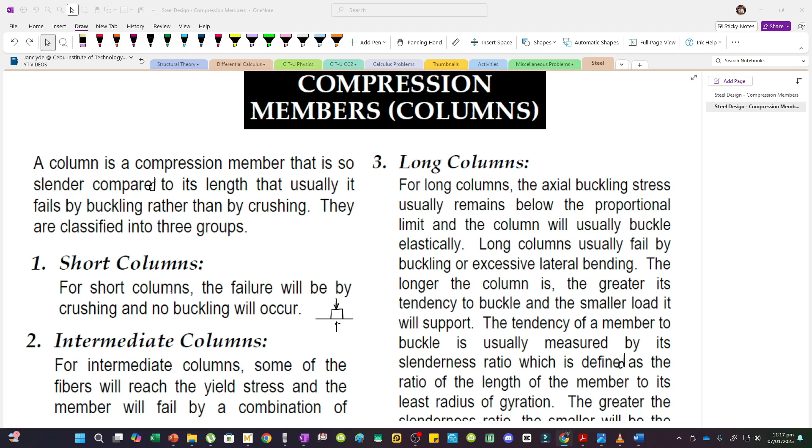Now for intermediate columns, there are two failures: yielding and buckling. Let's elongate this. This part is crushing, this is for concrete columns. For steel, I put yielding, yielding failure. So for intermediate columns, it's yielding and buckling.

But for long columns, the failure is by buckling alone. If you try to imagine, for long columns, our member is within the elastic zone.

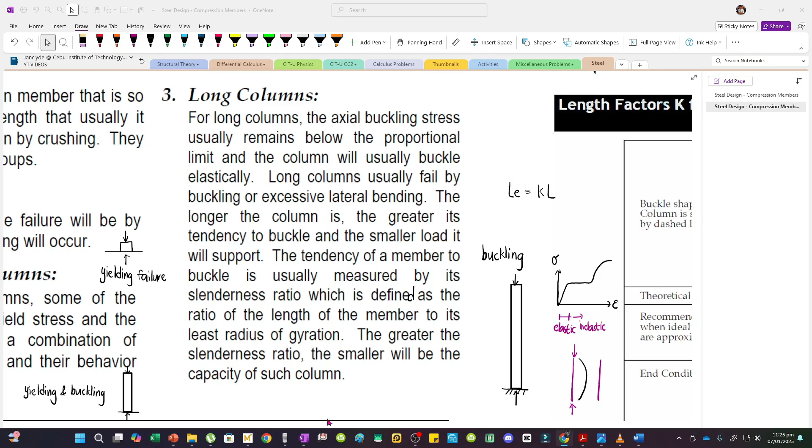Now why are there two failure modes for intermediate columns? It's because part of the column yields, and part of it buckles - so it's a combination of the two failure modes. This is the reason why, in intermediate columns, once we solve for the capacity, it's just the interpolation between yielding failure and buckling failure - like an interpolation between short column and long column.

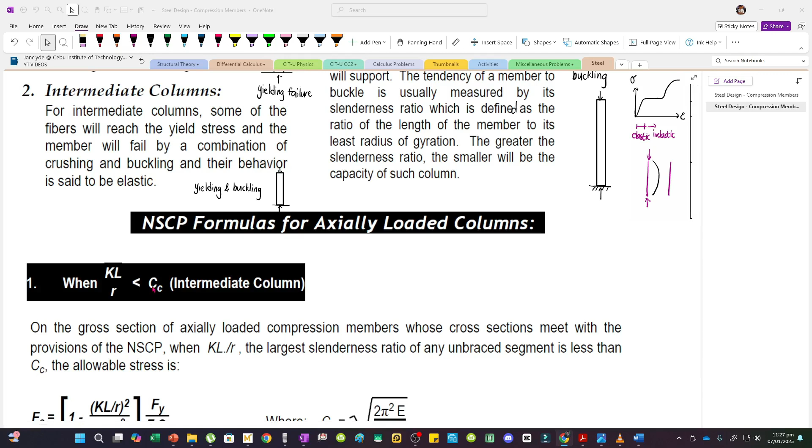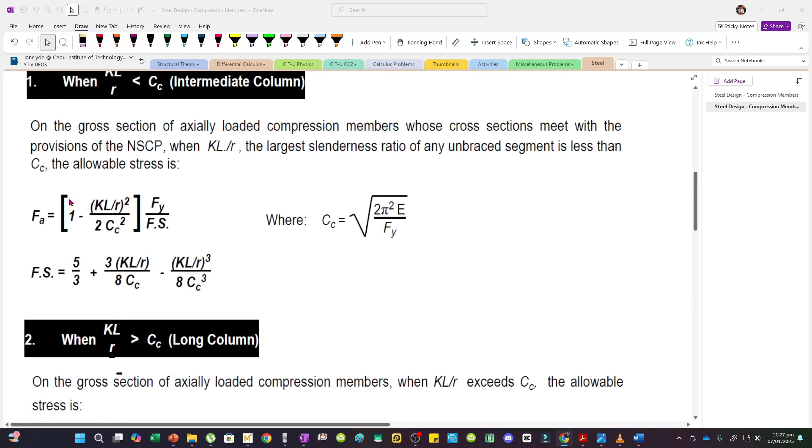If we look at the NSCP formulas, we have the following conditions: when the slenderness ratio KL over R is less than C sub C, that's the intermediate column. And when KL over R is greater than C sub C, that's what we consider a long column. Only two conditions - there's no condition for short columns, because short columns have no practical use. In buildings and houses, our columns are always long, so there's no point considering short columns.

Now for long columns, to know the capacity before it buckles, the concept we're going to use is the one derived by Euler. This is called Euler's formula with a factor of safety of 23/12.

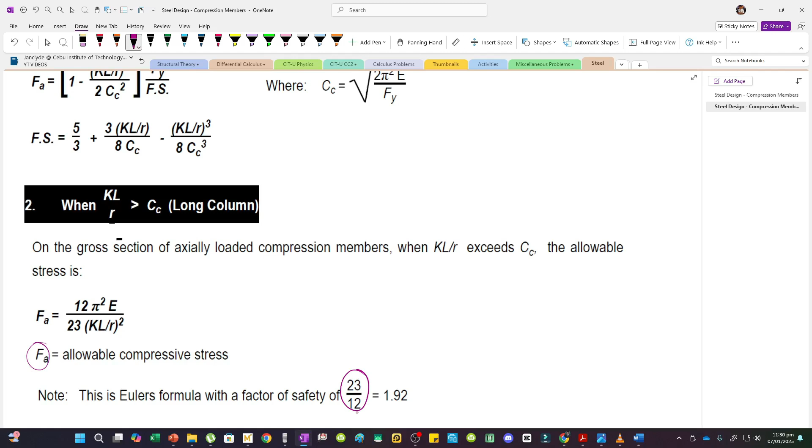Now, why does the factor of safety become 12/23? Notice that FA is the allowable compressive stress. When you have a factor of safety, you can either multiply it to the applied load or divide it into the stress. Now this is a stress value - pi squared E over KL over R squared - this is essentially the critical buckling stress. So stress divided by 23/12, just take the reciprocal, that's why it becomes 12/23.

Now in some books, instead of FA, the label is FE, F sub E. But F sub E doesn't include the factor of safety. This is a formula for stress - let's put Euler's buckling stress as F sub E. This is essentially pi squared E divided by the slenderness ratio, squared.

Now in some books, this is also written as SR, depending on your reference. Now we also have Euler's buckling load, which is P sub E. The formula is pi squared EI divided by KL squared. Our L is the unsupported length.

However, there's no need to memorize this one, because we already know the stress - just multiply it by the area, and you'll get the load. So essentially, the alternative formula for PE is FE multiplied by the gross area. Back in my undergrad, these were really just the important formulas - this one and this one.

Now let's try to draw a graph involving stress and the slenderness ratio. Stress is on the y-axis, and this is the slenderness ratio, let's call it SR. This is essentially the curve - this part is for short or intermediate columns, and this part is for long columns. They have a point of intersection essentially.

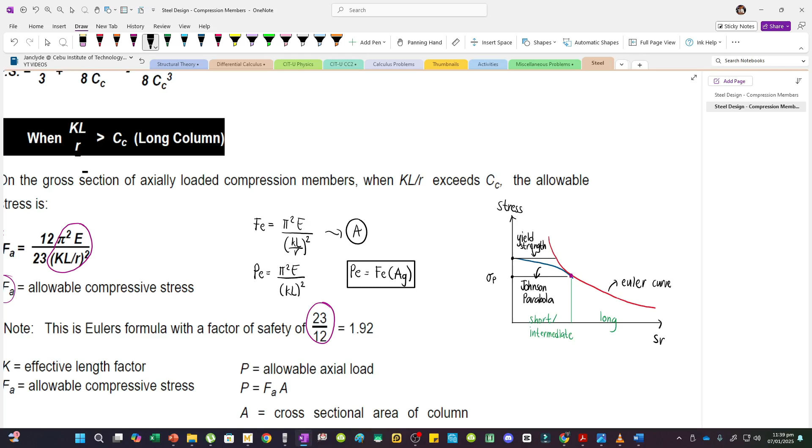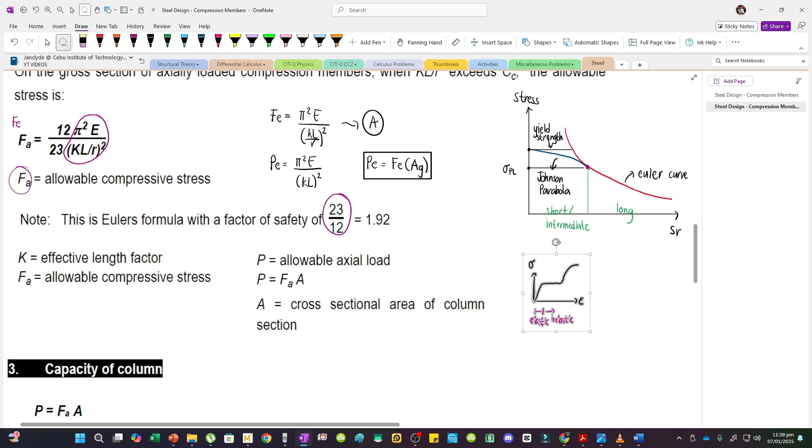Let's recall our stress-strain curve from Mechanics of Deformable Bodies. Somewhere here is the proportional limit, then this is the elastic limit, and here is the yield stress, this is Fy.

Now in real life, when we test just a rod, like in the CMT stress-strain test, these three values - the proportional limit and these three - are approximately equal. But for axially loaded columns, this value is quite lesser than the yield stress.

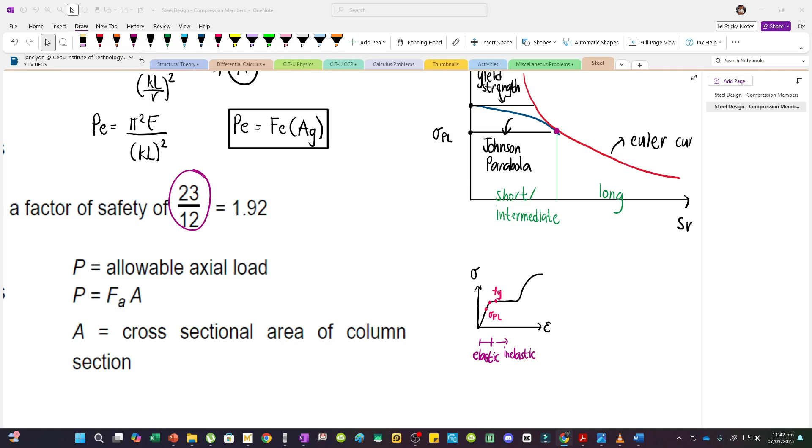The reason for that is if we fabricate sections, there are imperfections, so at lower stress levels already, there's a boundary in the elastic zone. When you trace the Johnson parabola, this blue one, it will end at the yield strength.

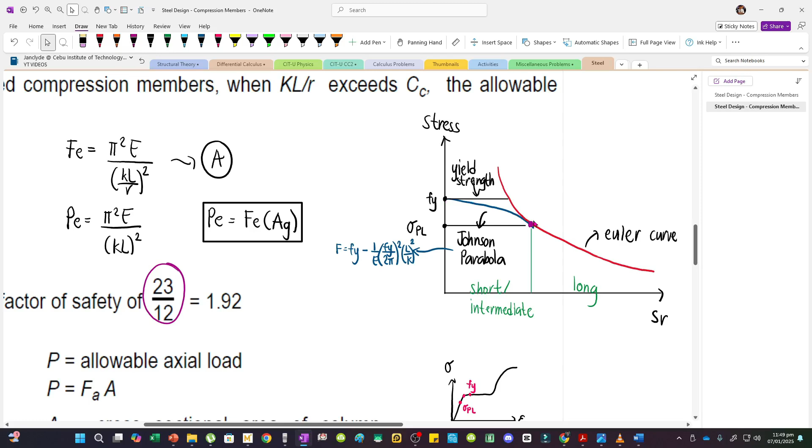But this is rarely asked since you seldom need to interpolate there. Essentially, we can just use this formula for intermediate columns.

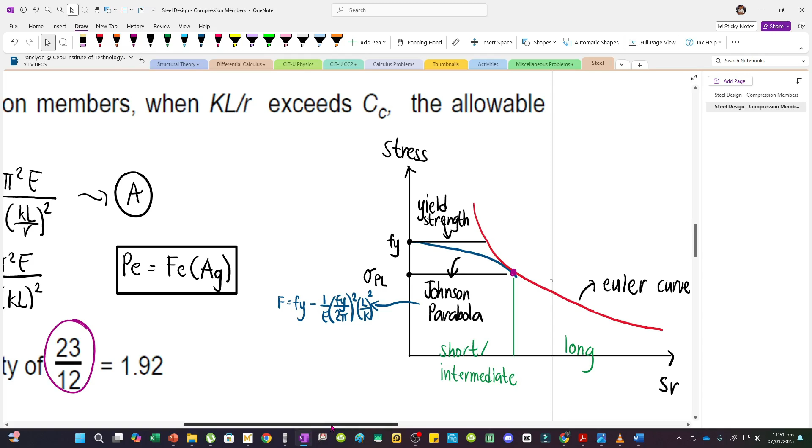Pi squared E divided by SR squared. But in the code, we are trying to reduce it. So what happens is our FCR would be...

0.877, this is the reduction factor essentially of the Euler buckling stress. 0.877 FE. So instead of 100% of FE, what we take is about 87.7% of that stress. And this one, the formula is too long if we use the empirical formula, but it's been reduced in NSCP 2015.

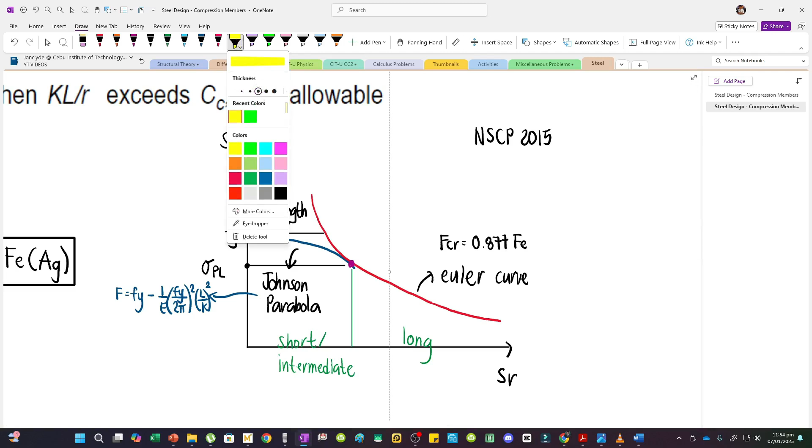So the new FCR for this is 0.658 to the power of Fy divided by Fe, multiplied by Fy, for the reduction factor. That's unitless, since Fy is in MPa and Fe is also in MPa, so our unit is still a unit of stress.

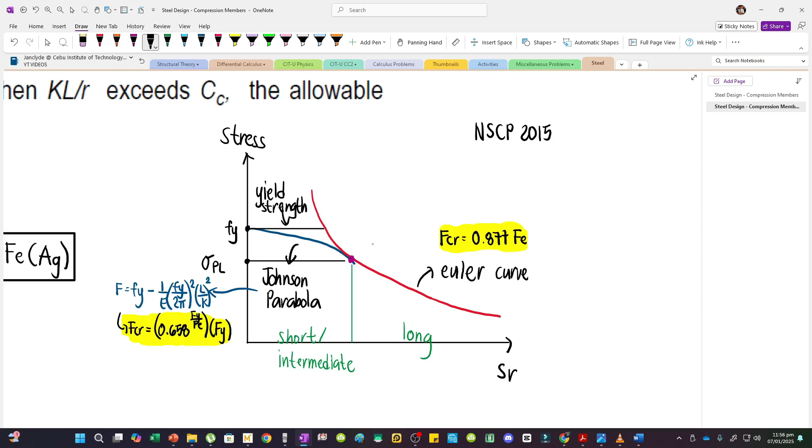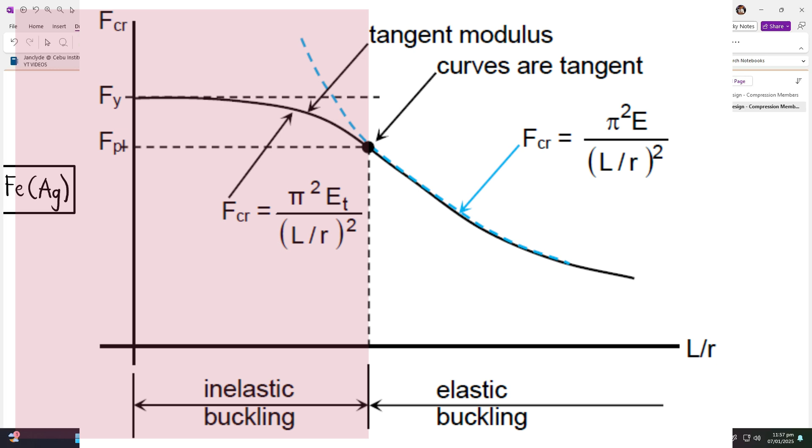If the slenderness ratio is lesser than or equal to 4.71 square root of E divided by Fy, this is the intermediate column sa dating code. But ngayon, that's the region for inelastic buckling. This defines the transition region, parang itong naka-green line. Kapag lesser than ka, intermediate column. So inelastic buckling happens. And then kapag greater than naman, mas malaki kesa dito, kino-consider na siya as long column.

So apply this formula na, since nasa elastic buckling na tayo. So for long columns, this is greater than SR. However, may mas madaling way. Instead of using this one, meron kang alternative. Instead of comparing this one and this one, you can just check 0.44 Fy.

If Fe is lesser than 0.44 Fy, long column. Tapos kapag Fe naman, Fe is greater than or equal to 0.44 Fy, intermediate column tayo. So kulayan na lang din natin to. This is for NSCP 2015.

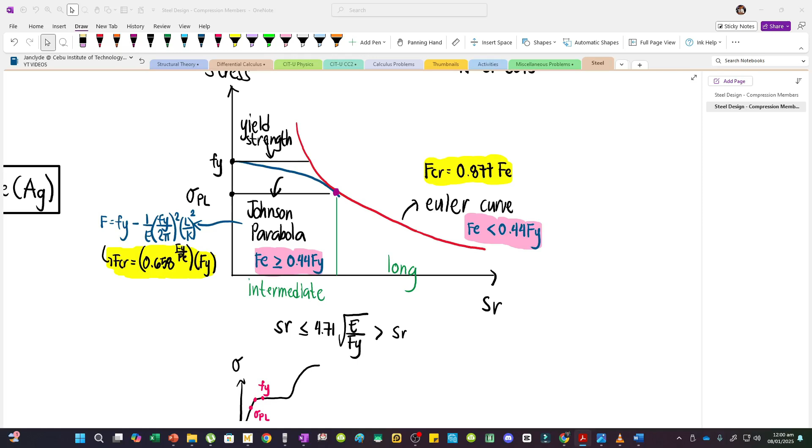Now, saan galing yan? Yung 0.44 Fy. Ito yung nasa code provisions talaga. Papakita ko. Para sa checking nito, ito yung nasa NSCP 2015. Ayan, and then para sa checking naman ng kabila, ito dapat.

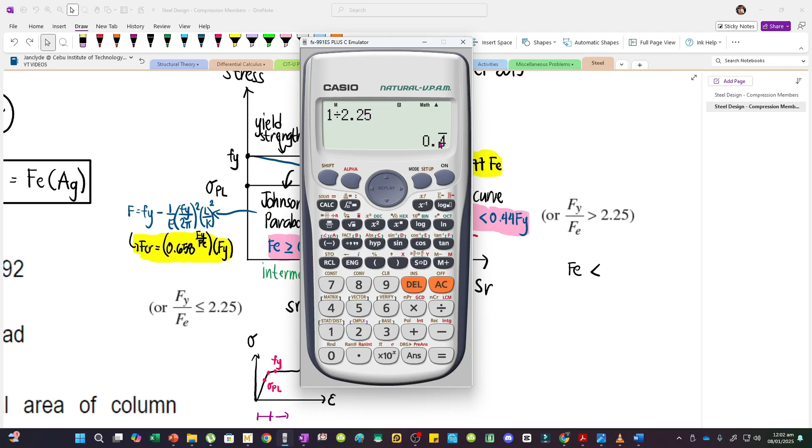Now, yung ginawa natin is, we just rearranged the formula. Diba, this expresses an inequality. Ginawa is Fe, nilagay sa gilid, and then pinalit natin yung location ng Fe, nasa right na siya, so babago din yung sign. And then 2.25, divide mo sa Fy. What is 1 divided by 2.25? Diba, this is 4 over 9 or 0.444, non-terminating decimal yan.

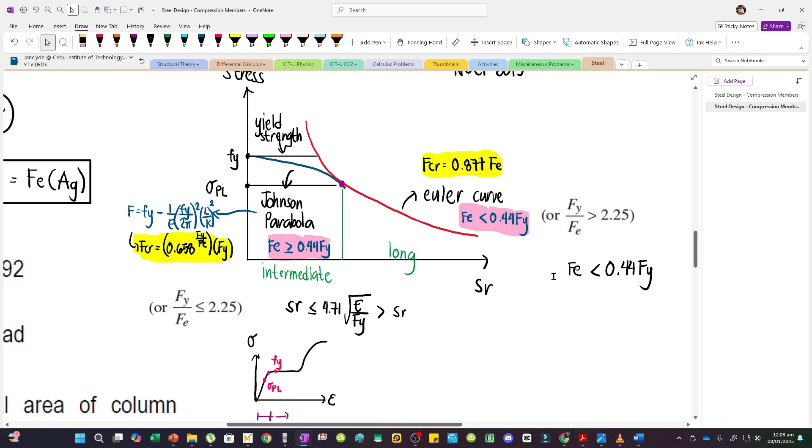0.44 Fy. So I hope malinaw lang. Pero before using this one, let's try to solve using the old code. Ito lang muna, sa next video na lang natin isusolve na natin talaga using these conditions. But again, for now, ito lang muna.

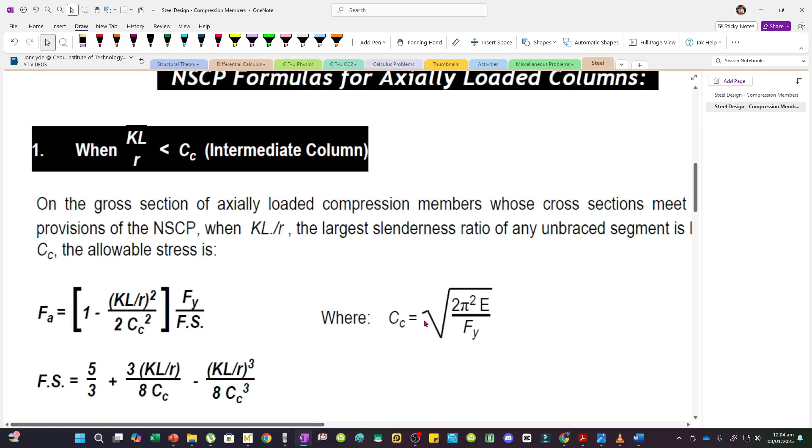For long columns and for intermediate columns, itong C sub C, para lang yung transition region. Parang ito yan, 4.71 square root of E divided by Fy. But instead of this one, sa old code, 2 pi squared E divided by Fy yung ginagamit. Yung 2 pi squared, square root yan, pwede nating ilabas. Ano yung value? Square root of 2 pi squared, this is 4.443.

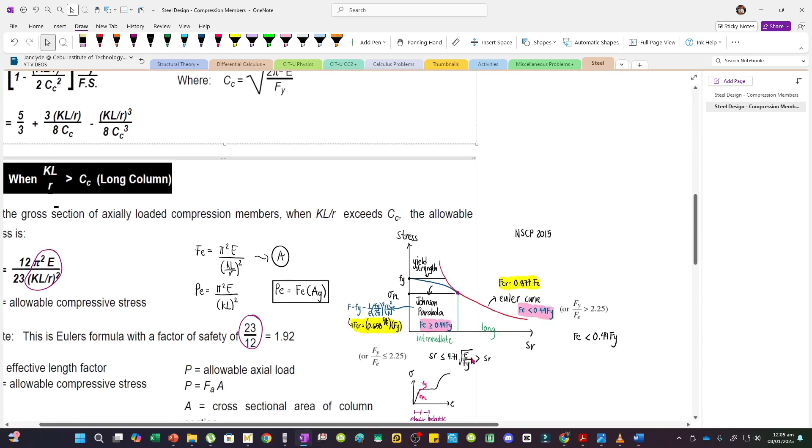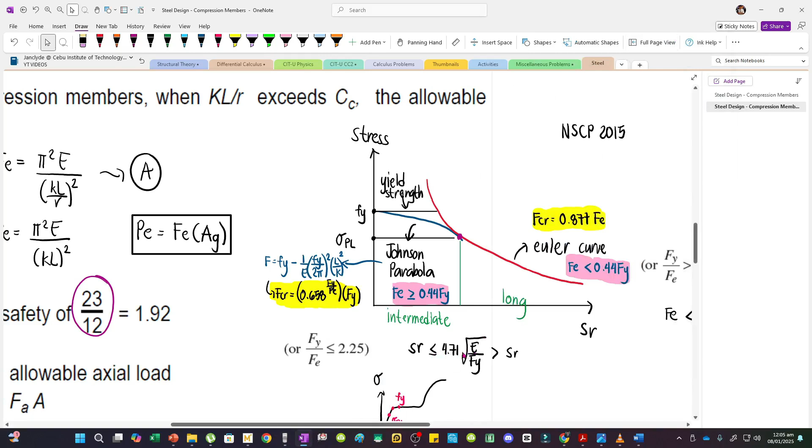So essentially, para lang yang ito, 4.71 square root of e divided by fy, but meron lang nagbago from 4.44 naging 4.71 na siya dito. So again, this is para mas conservative yung design. But ito lang talaga dati, theoretical kasi to. Sige, so proceed na tayo sa problem natin.

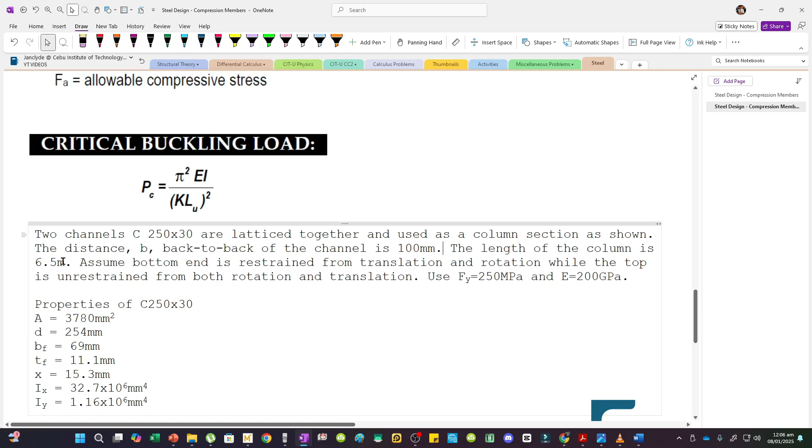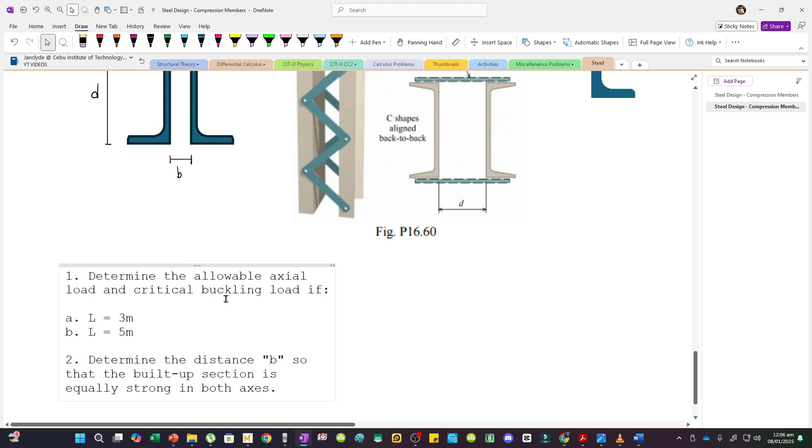We have this one: two channels, C250 by 30, are latticed together and used as a column section as shown. The distance B back to back of the channel is 100 mm and the length of the column is 6.5 meters. Meron kasi tayong dalawang conditions: first, when L is 3, and then when L is 5 meters. We have to assume bottom end is restrained from translation and rotation while the top is unrestrained from both rotation and translation. Use Fy equals 250 MPa and E equals 200 GPa.

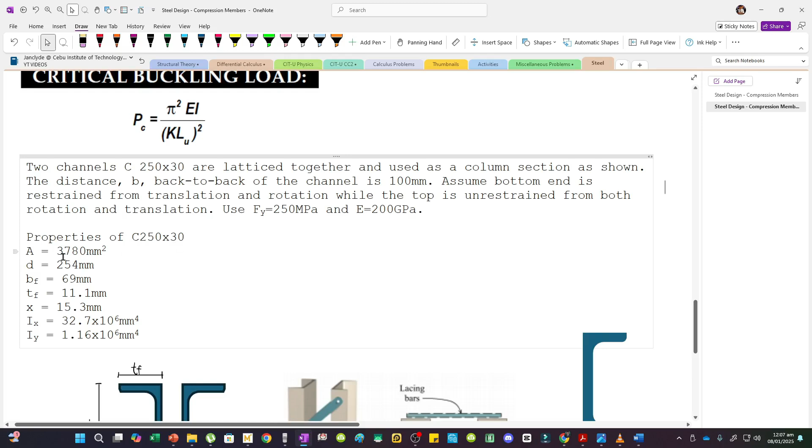Now, ito yung properties natin for the channel. The area is 3780 and then the depth is 254. For one channel, ito yung depth, this is D equals 254 mm. And then BF naman, ano yung BF? Yan yung flange width or width of the flange. Ito yung flange, ito naman yung web. So this length pala, this is BF equal to 69 mm.

And then TF is the thickness of the flange, this one and this one. So we have 11.1 mm saka sa kabilang side. Now, hindi binigay yung thickness ng web. Hindi naman yan kailangan kasi binigay yung distance ng centroid measured from the web.

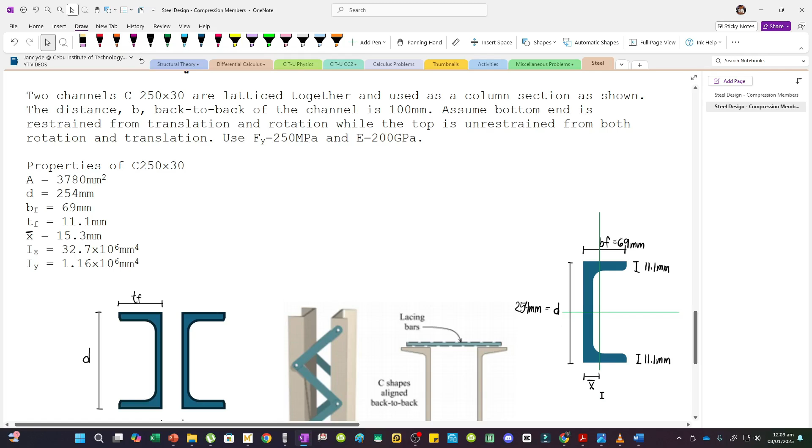Again, yung x dyan is essentially barred x. And then kapag channel, yan yung measurement from the web going to the centroidal axis, the centroidal y-axis. So sabihin natin, this is barred x. So we can draw the centroidal y-axis. Yung centroidal x-axis natin, nasa gitna lang, kasi diba meron tayong horizontal axis of symmetry. Equal kasi yung figure na yan sa figure na nasa ilalim. And then, bakit hindi measured from this point yan?

Notice na majority of the area is located dito sa web. So yung value ng barred x is 15.3. This is significantly lesser than 69. So dapat, yung barred x is malapit sa kung saan majority ng area natin. So this is 15.3 mm.

And then, we are given Ix and Iy. So hindi mo na yan isusolve na, let's say, you will split this into 3 areas and then solve the moment of inertia, centroidal moment of inertia. Hindi na yan ganyan, since given na siya agad. By the way, yung Ix saka Iy, yan yung centroidal moment of inertia pala, hindi yan with respect to the base or with respect to the vertical axis. Centroidal yan. But for each channel, hindi yan yung total I para sa buong section talaga. For each channel yan. So gagawin mo, kapag meron kang built-up section, you have to solve the new moment of inertia.

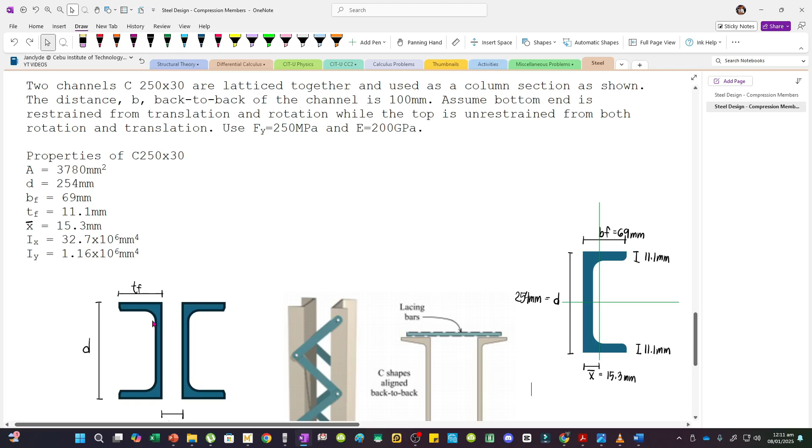The new centroidal moment of inertia. So this is our figure, and this is the cross-section. Now, if you look at it from the top or isometric view, this is the top view essentially.

This is the cross-section, and there's a space here due to the lacing bars. The lacing bars keep the two channels together. So we call this a built-up section since it's not just one channel — it's two channels combined. But we don't have a figure for that, so don't include it, it's just the lacing bars.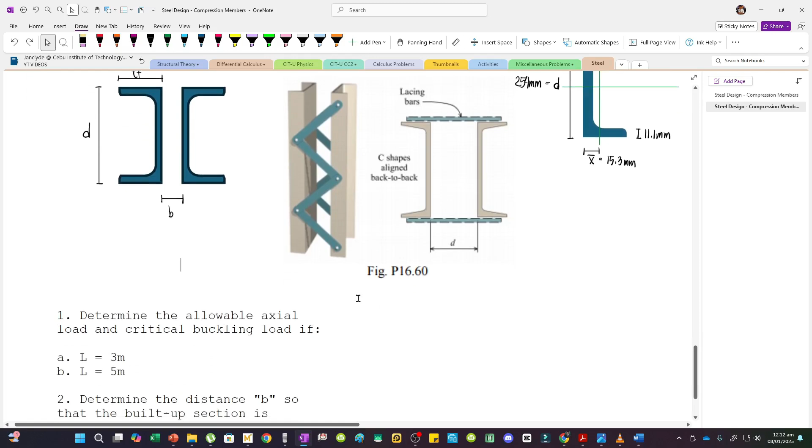What we have to do first is solve the new centroidal moment of inertia about the x and y axis. From there, we can solve the slenderness ratio and later the capacity. The first question is: determine the allowable axial load and critical buckling load if L is equal to 3, and if L is equal to 5. So this is what we will do.

First, we will solve the new centroidal moment of inertia about the x-axis. Thankfully, the figure is symmetrical, so automatically our centroidal x-axis is located at the center. This is the centroidal x-axis, and our centroidal y-axis is located here at the center.

Now the value of B is 100 mm, the distance back to back of the channel. This is 254, and this is BF, 69. But again, we don't need that for our problem.

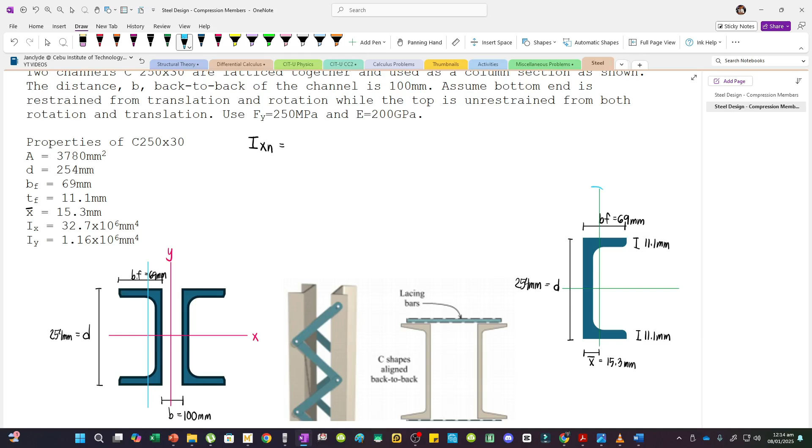What we need is the distance from the web going to the centroid of the figure of each channel. So here it is — this is the green line. Let me copy this, and the centroid of the other channel is located right here. So this distance, going to the tip of the web, is 15.3 mm. And on the other side, it's also 15.3 mm.

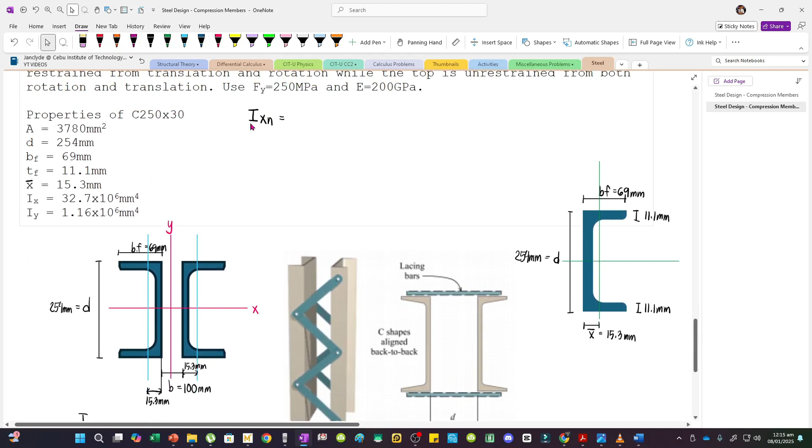Now initially, the centroidal x-axis is at the center. In the built-up section, it's also at the center since it's still symmetrical top and bottom. So in solving Ix, the new Ix, I'll just place it here. This is Ixn — we can just multiply Ix, the centroidal moment of inertia of each channel, by 2, since there are two: this one and this one. There's no transfer formula needed since the initial centroid of the figure of one channel is the same as in the built-up section.

So this would be 2Ix, which becomes 2 times 32.7 times 10 to the 6. So the value is 2 times 32.7, which gives us 65.4 times 10 to the 6 mm to the 4th.

Now our problem is Iyn, or the moment of inertia about the centroidal y-axis. The reason is, this is the y-axis initially, and the centroidal x-axis. The centroidal y-axis of the initial figure does not coincide with the centroidal y-axis of the built-up section, because the centroidal y-axis of the built-up section is really at the center. Therefore, we have to apply the transfer formula after adding the two centroidal moment of inertias about the y-axis.

So essentially, we have 2 times Iy plus the transfer formula for the two channels, again times 2 — it's in parenthesis, so it will be distributed to the two terms. So we would have 2 times Iy, which is 1.16 times 10 to the 6. Notice this is lesser than Ix.

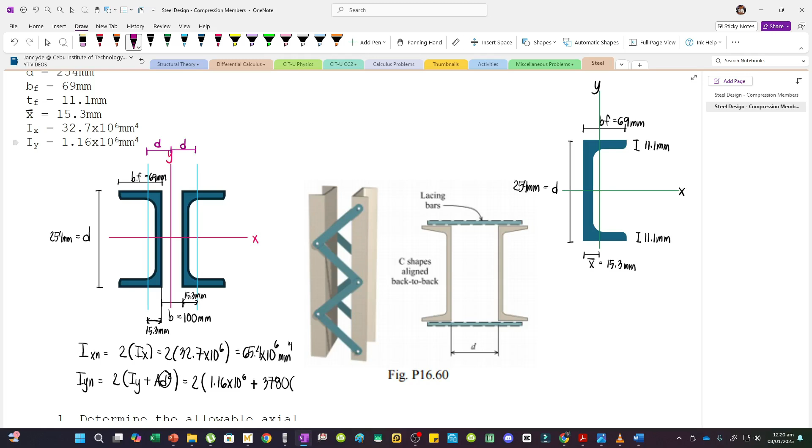There are two of them, and since both sides are equal, we just multiply by 2. So solving D, this would be — I hope you agree — 15.3, this distance, plus half of B, which is 50 mm. So D is equal to barred X plus half of B, or plus B over 2.

Now, kapag numerical value na yan, we would have 15.3, then plus B over 2, 100 divided by 2. Wag mong kalimutan na naka-square yan. So squared, and then we can now solve Iy. Input na lang natin sa calculators: 2 times 1.16 E6 plus 3780 multiplied by 15.3 plus 100 over 2, tapos naka-square, and then press equals, we have this one.

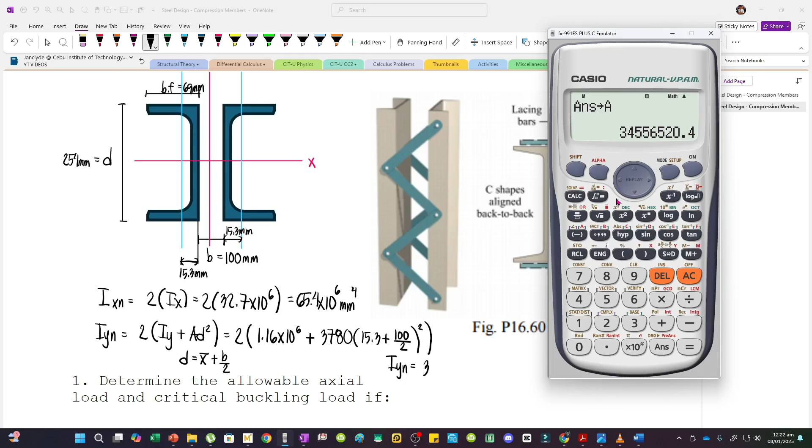Medyo mahaba yan, so pwede mo siyang i-store. Shift store, let's say ilalagay ko yan sa letter A. Sulat ko na lang yung numerical value para mas madali niyong ma-recall, but I will use the stored value sa solutions ko. So, 34556520.4. Ayan, this is mm to the fourth.

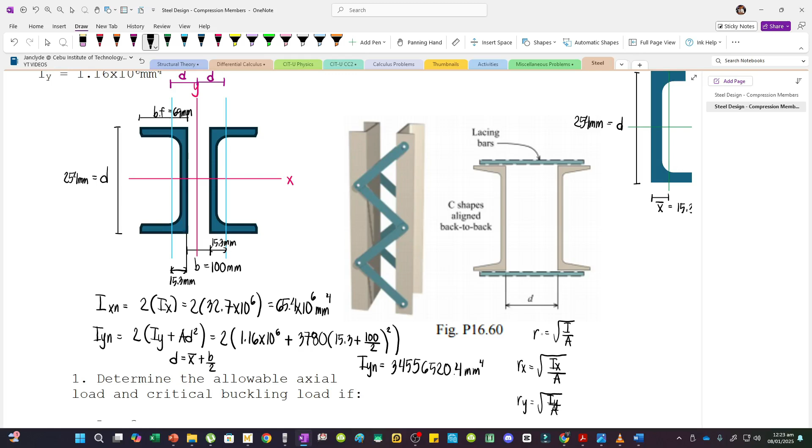Ito yung Iy. Now, to solve the radii of gyration para sa x-axis and the y-axis, diba, our formula is r equals square root of I divided by A. Now, for Rx, we have to use Ix divided by A. And then for Ry naman, we have to use Iy divided by A. Now, A here is the total area sa built-up section, so total ng dalawang areas, hindi isa lang.

Diyan usually nagkakamali yung mga students kasi kapag A na, yung ginagamit lang is 3780. But dalawang channels kasi, so you have to multiply the area by 2. Yan lang yung consideration mo talaga.

Sige, so let's first solve Rx. Rx is Ix, this is for the total figure na, the built-up section. Itong Ix, we have 65.4 times 10 to the 6, unit is mm to the fourth. Then divided by area—again, area, we have to use 2 channels. So 2 times 3780, this is mm squared. Notice na magka-cancel yung 2 dyan, saka yung 2 dito, so pwede lang yan, Ix divided by A automatically.

But para alam nyo yung concept talaga, kasi minsan, yung centroid ng built-up section mo baago talaga sa x-axis saka sa y-axis. So mas maganda kapag alam mo yung total Ix for the built-up section, and then total area din, para sa lahat ng members mo. Now for the units naman, this is mm to the fourth, this is mm squared, so yung matitira na lang is mm squared. Kunin mo yung square root, the unit will be mm—so this is a unit of distance pala, yung Rx saka Ry.

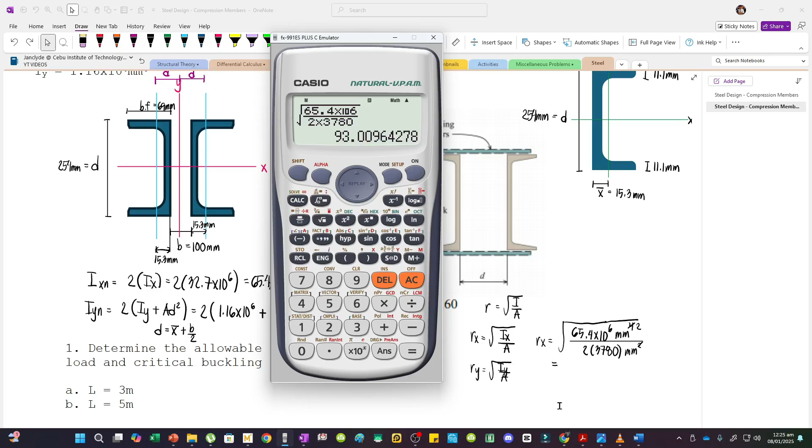Now pag isosolve natin yan, we have 65.4 times 10 to the 6, then divided by 2 times 3780, so magiging 93.01 approximately. This is mm. Now, again, nakastore yan sa A. Ito naman, pwede ko siyang i-store sa ibang value, let's say ilalagay ko sa B. And then yung Ry naman, this would be Iy, which is this value.

Kopyahin na lang natin, and then divided by the area, total area pa rin, 2 times 3780. So solving Ry, input ko na lang dito, yung value na yan nakastore sa letter A. So recall A na lang, and then divided by 2 times 3780, we would have 67.609, tapos naka-mm. Store ko na lang to sa letter C, shift store, lagay ko sa C. Wait lang, hindi ko pala yan na-store: 65.4 E6 divided by 2 times 3780.

Now we will compare SR, SRX saka SRY, yan yung slenderness ratio. So this is KL over R: KL over Rx, at ito naman, KL divided by Ry.

Now we have to first determine K. Ito yung dapat mong tandaan: kapag same lang yung length, unbraced length, sa dalawang axes, sa X and Y, then just consider the lesser radius of gyration as the critical. Diba, 93.01 yung Rx, Ry naman is 67.609. The lesser one is 67.609, which is Ry, so ito na yung magiging critical. Na magbabago lang yan kapag magkaiba yung unbraced length sa X and Y axes.

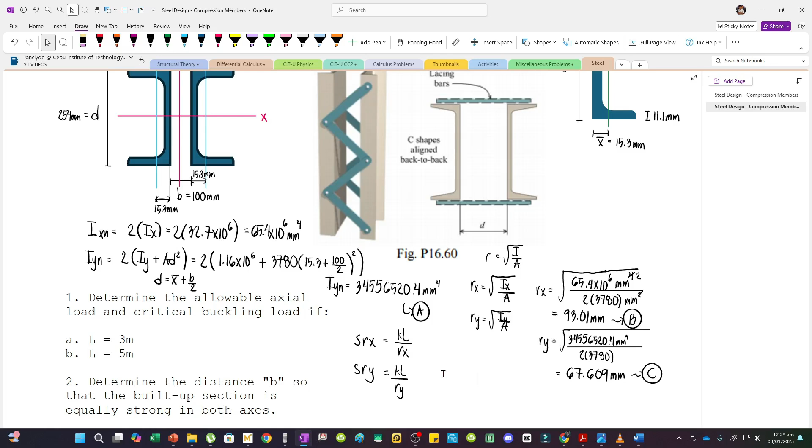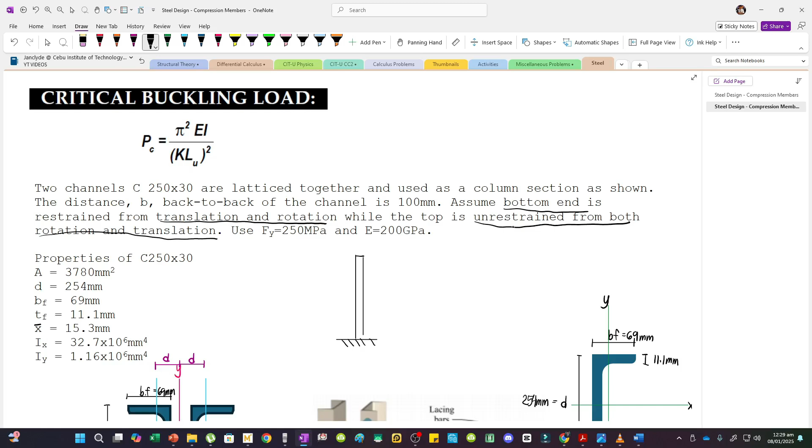So what is K pala? Bottom end is restrained from translation and rotation, so walang translation and rotation, fixed pala yung nasa ilalim—parang ito yung column. At yung nasa top daw is unrestrained from both rotation and translation, so translation free and rotation free—yan yung parang naka-circle, yung end. So ito pala yan.

Tingnan natin ha. Rotation free, translation free, fixed, saka circular—letter E pala yung configuration. Therefore, we have to use a k value of 2, yan yung modifier natin. So using 2, screenshot ko na lang to. K is equal to 2. Therefore, we have 2 times L.

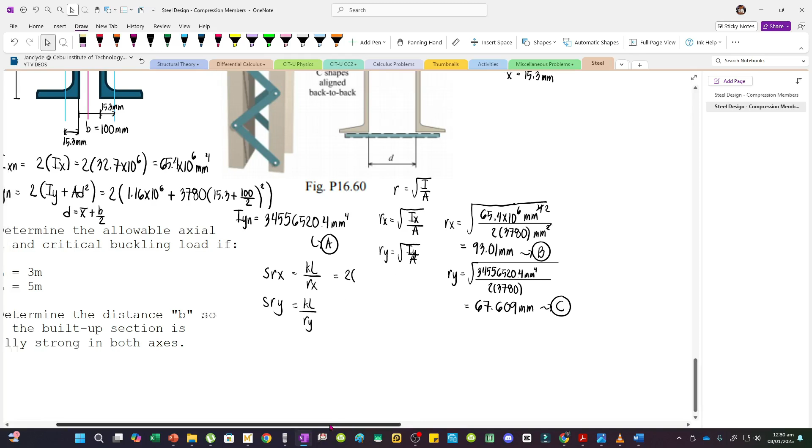For the first condition muna, when L is 3 meters, pero kailangan naka-mm yan, kasi diba Rx is naka-mm. So multiply this by 1,000 para maging mm, this would be 3,000. Divided by Rx, which is 93.01, naka-store yan sa letter B. And then for SRY naman, still the same: K is 2, L is 3,000.

And then RY is nakastore sa letter C. Now what you can notice is yung value ng Rx saka RY, yung radii of gyration, nasa denominator yan. Now diba, mas malaki yung denominator, mas maliit yung number. Kasi diba, 1/4, mas maliit yan kesa sa 1/2. So essentially, the larger the radius of gyration, the stronger the capacity of the column.

Now what will govern is the weaker axis. Kasi yan dapat yung tutulungan natin. Or yan dapat yung consideration natin para sa total design talaga.

So, solving SRX, we have 2 times 3,000 divided by B, which is 64.51. Unitless yan ha. This is mm. Rx is naka-mm din. So, wala na yung unit.

And then, solving SRY naman, this is to be divided by C. Recall C, ayan, 88.746 or 75. Now, pwede ko yung i-store.

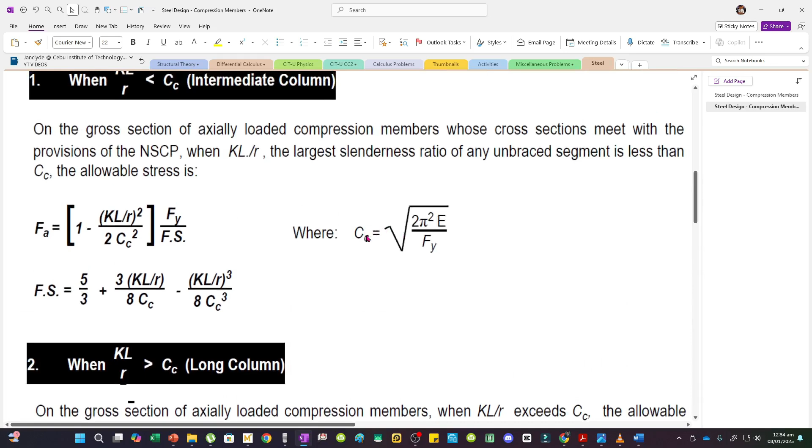Square root of 2 pi squared E divided by Fy. Lagay natin. So, input mo lang yung values. We have 2 pi squared. What is E? E must be in MPa.

Ito yung dapat mong tandaan. Kasi Fy is usually naka-MPa yan. E is naka-GPa. So, you have to convert GPa into MPa. Multiply it by 1,000. So, our E is 200 GPa, para yung 200 times 10 to the 3 MPa.

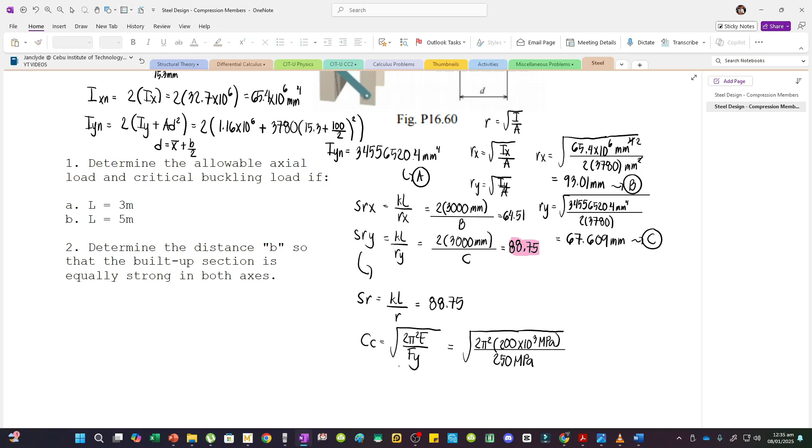And then, divided by Fy. Fy is 250, MPa rin yan. And then, solving CC, we would have square root of 2 pi squared times 200 E3 divided by 250. This is 125.66.

Now, compare natin. SR is 88.75. This is KL over R. CC is 125.66. Mas malaki siya. So, lesser than 125.66. Ayan. So, ano yung condition na mamimit natin? KL over R is lesser than CC.

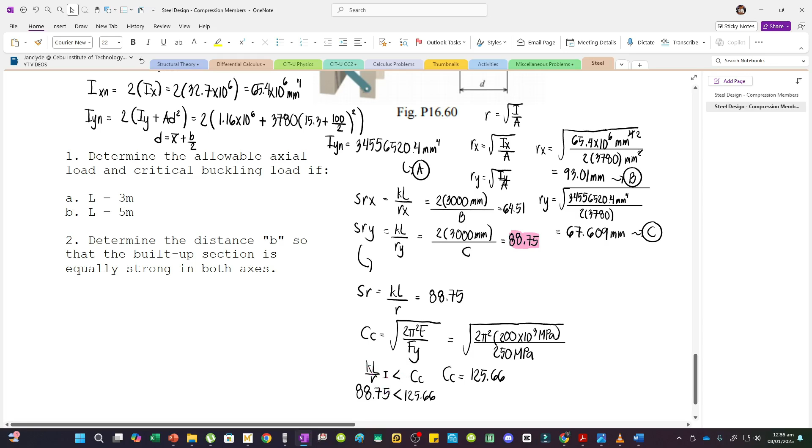Ito yan. Intermediate column. Therefore, our analysis would follow this one when solving the allowable stress. So, the allowable stress is F sub A. Ito yung formula niya. Ayan. Lagay na lang din natin yung conclusion natin. Intermediate column.

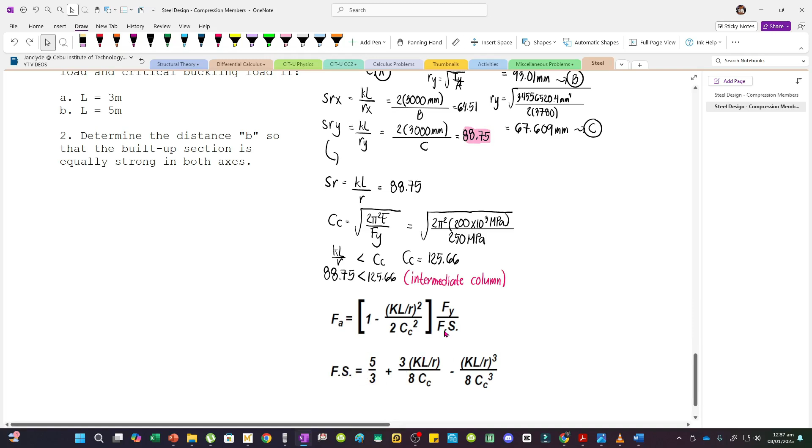Ayan, now diba, kung titingnan mo yung formula, napakahaba. And then yung Fs natin, meron din siyang value dyan. Now yung Fs is, essentially yan yung factor of safety. Dinivide natin yan sa value ng stress. So we can interpret this as, parang ito yung value ng stress talaga, then divided by the factor of safety.

Ayan, now to streamline this, kasi medyo mahaba yan, ito yung ginagawa ko. Ito din yung tinuro ni Sir Ibora dati. Diba, meron kang KL over R divided by CC. Common yan sa maraming terms. Ito, merong KL over R divided by CC. Saka ito rin, KL over R divided by CC.

So what we can do is, pwede natin yung store sa calculator natin. And then, what will happen is, instead of using this formula, we would have 1 minus, diba, this is essentially 1 over 2 or 1 half. This is 0.5. Then KL over R divided by CC, naka-square yung dalawa.

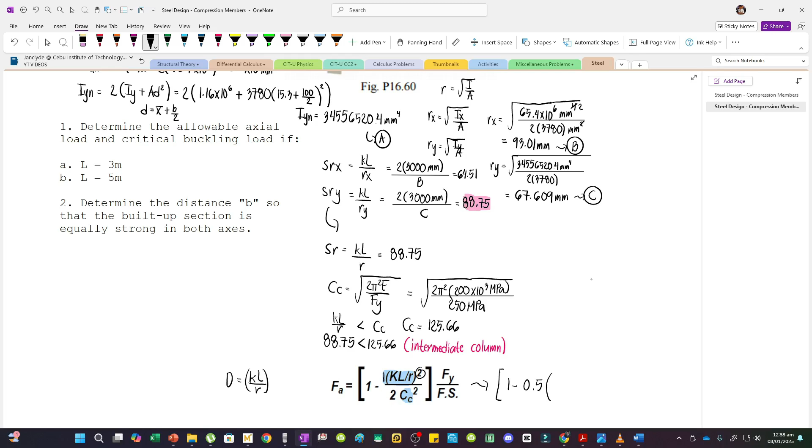So i-store natin yung KL over R divided by CC sa isang variable. Now nagamit ko na yung letter A, B, saka C. So i-store na lang natin sa letter D. So dyan naka-store yung KL over R divided by CC. Ayan. But naka-square yung dalawang terms, numerator saka denominator. So let's say, ito yung variable na ginamit mo, letter D, then i-square mo siya.

Yan, naka-square. Then multiplied by Fy, and then, diba, ito yung stress, then divided by the factor of safety. Ito yung factor of safety. So this would be 5/3, then plus 3 over 8, KL over R divided by CC, yan yung nakastore sa D.

So, lagyan mo lang yan. Lagyan mo ng D, and then minus KL over R divided by CC, tapos naka-cube yung dalawa. And then, meron tayong 1 over 8. So, 1 divided by 8, and then, yung variable na nakastore yung KL over R over CC, then kailangan naka-cube to account for this.

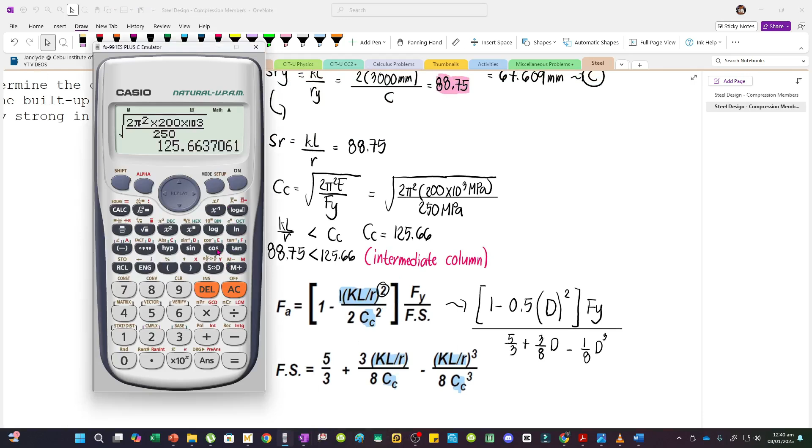So, ito na lang yung sauduhin mo. Yan, mas madali kapag ganyan. So, ito yung magiging process. First, we have to store KL over R divided by CC. Yung CC pala natin is, pwede natin siyang i-store sa letter E. D kasi yung ginamit ko dyan. So, ito, store natin sa E.

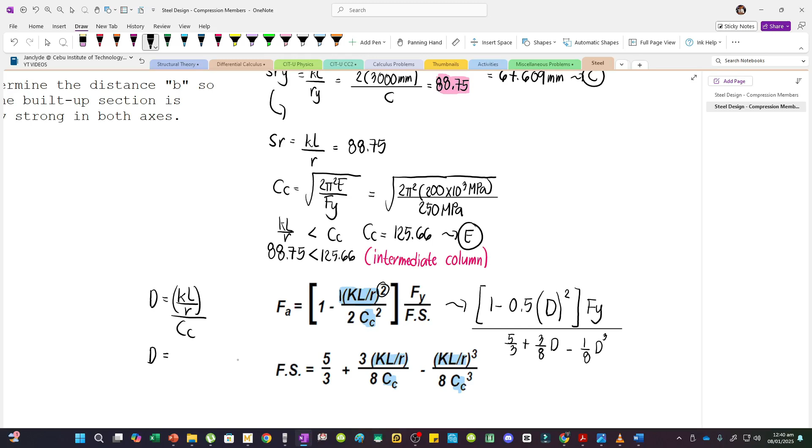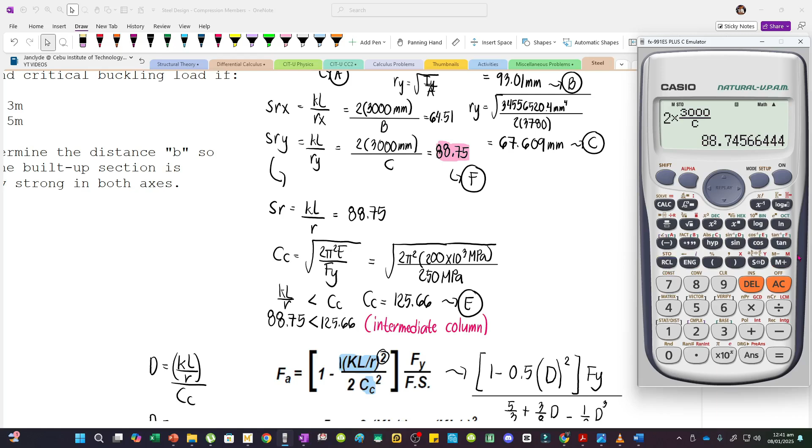Shift store E, we already have CC. Therefore D, what we'll input there, is KL over R divided by CC, this would be SR, which is 88.75. Now KL over R is not yet stored, we don't have a variable for that yet, so I'll just put it in letter F. So 2 times 3,000 divided by C. This is SR, shift store, I'll put it in F.

So I'll put F divided by E, this one divided by this one, equals 0.706. Then shift store, I'll put it in D. So that's already in D, let's input that into this formula. Let's put the approximate value, this is 0.70622.

Therefore FA would be 1 minus 0.5. Let me copy this. Now let's go to the calculator. So we have 1 minus 0.5 times D squared, needs to be in parenthesis, then multiply by Fy. Fy is 250, so 250 divided by 5/3 plus 3 over 8 multiplied by D, then minus 1 over 8 multiplied by D cube. So it's 99.4227.

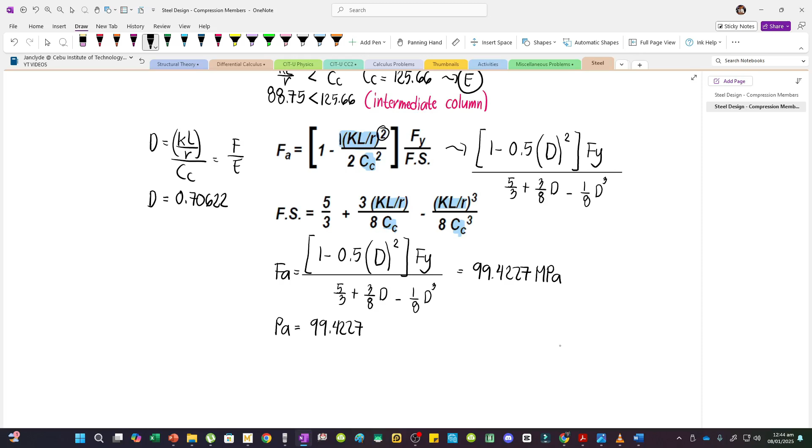Unit is MPa, that's stress, allowable stress. Now if allowable load is being asked, then you would have PA, this is equal to stress times area. So our stress is 99.4227, multiply that by the area. The area is 2 times 3780. So whatever comes out times 2 times 3780 equals 751,635.86.

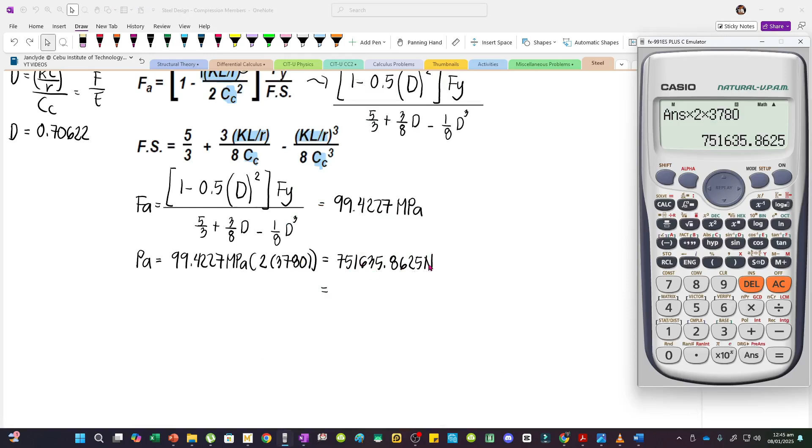That's in MPa, while this one is in mm squared, so the unit is newtons: 751,635.86 newtons. Converting this into kN, since in the board exam it's usually in kN because the value is quite large, just divide this by 1,000. So 751.64 kilonewtons. This is the allowable load.

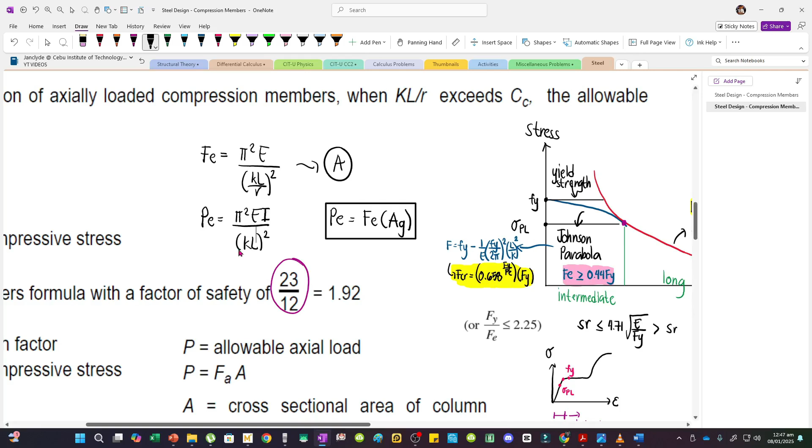Now what about the critical buckling load? Recall the formula I taught earlier, pi squared EI divided by KL squared, essentially this. So for the critical buckling load, we have pi squared times E converted into MPa, so 200 times 10 to the 3, then our I is the weaker I or the critical one, which is IY, stored in A.

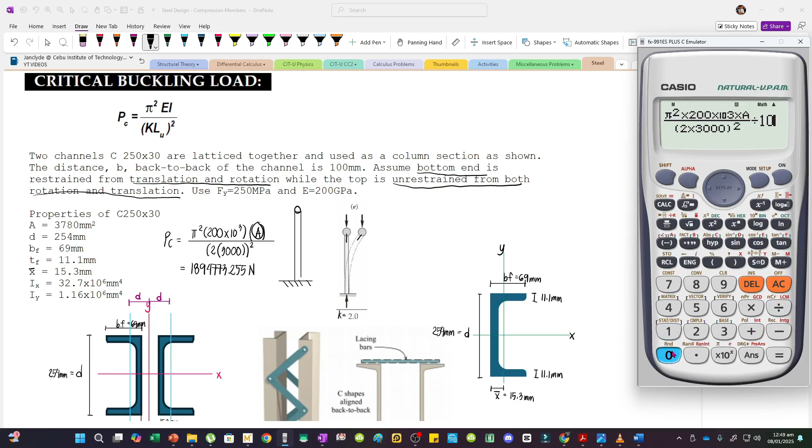That's the I. Then divided by KL squared. Our K is 2, and the unsupported length is 3 meters, which is 3,000 mm, and that needs to be squared. So we have pi squared times 200E3 times A divided by 2 times 3,000 in parenthesis, then squared, giving 1,894,773.255. This is in newtons, converting into kilonewtons, divide by 1,000, so 1,894.77. Let's move this for letter A.

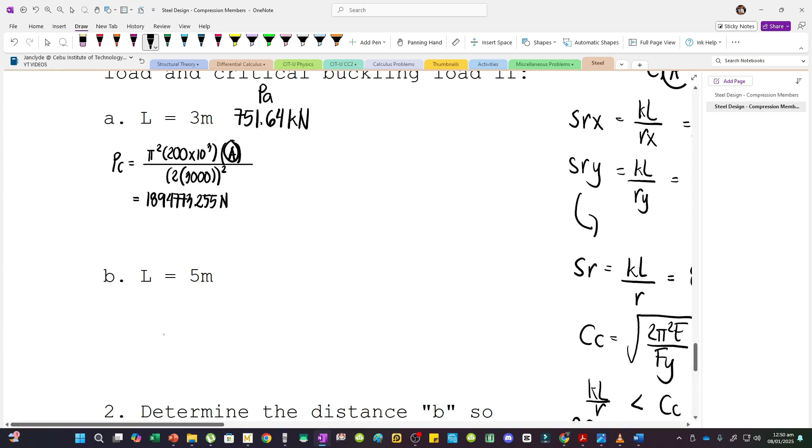But instead of memorizing this formula, you can just memorize the critical buckling stress, which is pi squared E divided by KL over R squared, then multiply this by the area to get it directly. Let me copy this, and alternatively we can use the stress. Our critical buckling load PC is FE multiplied by the area.

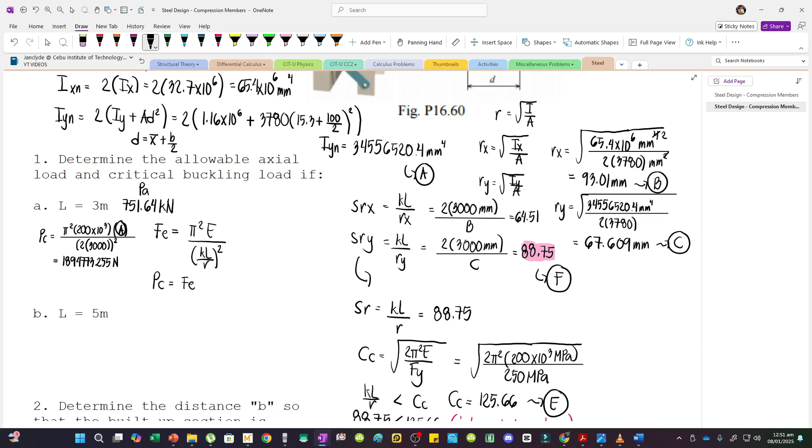So our FE is pi squared E, pi squared times 200 times 10 to the 3, divided by KL over R squared for the critical axis. We have the y-axis, stored in F, so recall F, and that needs to be squared, KL over R squared. That's FE, multiply that by the area, the area is 2 times 3780, so 2 times 3780, that's the load, the critical buckling load.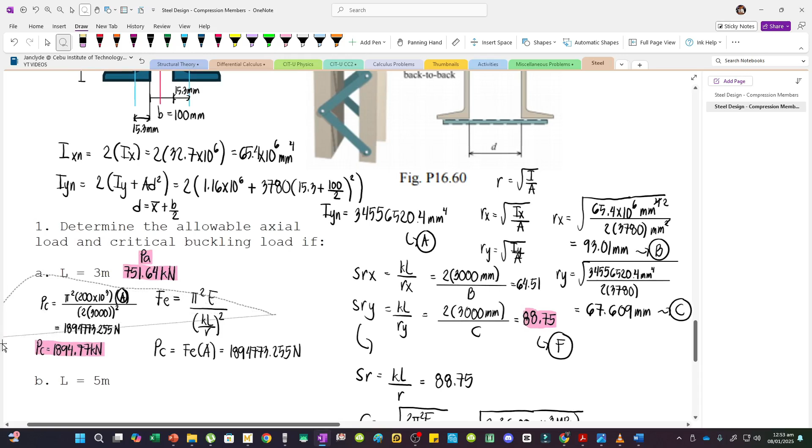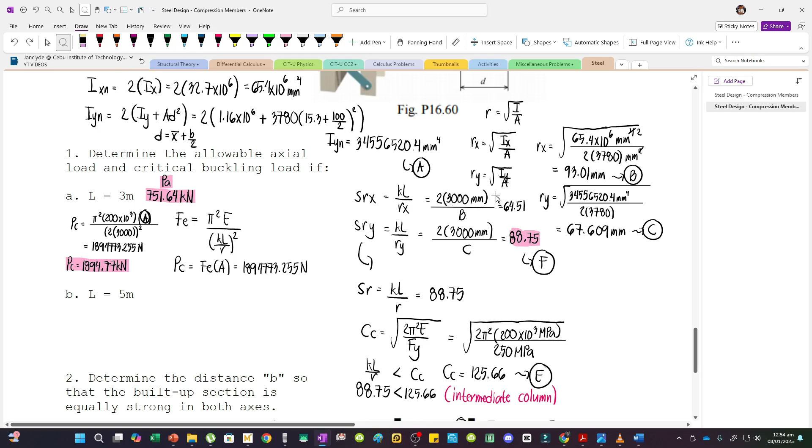Now what if L is 5 meters? If L is 5 meters, what would change? What would change is only SRX and SRY if L equals 5 meters. RX and RY stay the same value, nothing changes there. So what if, let me just copy this. This is now when L equals 5 meters, just change this to 5,000, and this too.

Then we can solve SRX and SRY. So, 2 times 5,000 divided by B, we have 107.52. And then for SRY naman, we have 147.91. So, mas malaki to. This would govern.

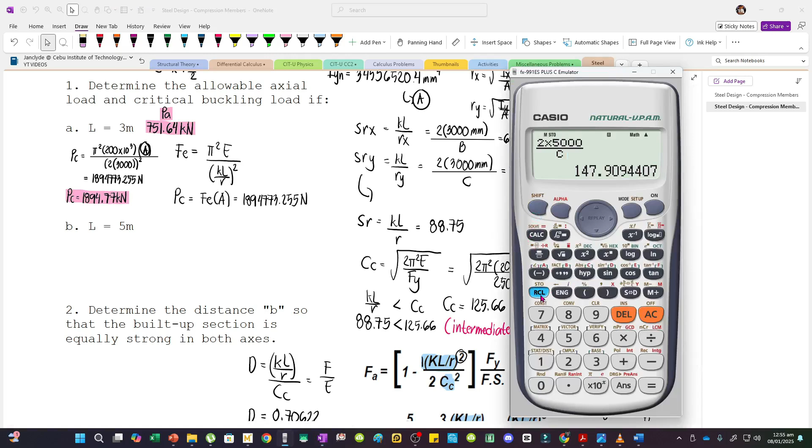Mas critical kasi yung mas malaking slenderness ratio. So, shift store, saan nga natin nilagay yun? Nilagay natin yung SR sa letter F. Shift store, lagay ko sa F. And then, for the conditions, we would have KL over R is 147.91.

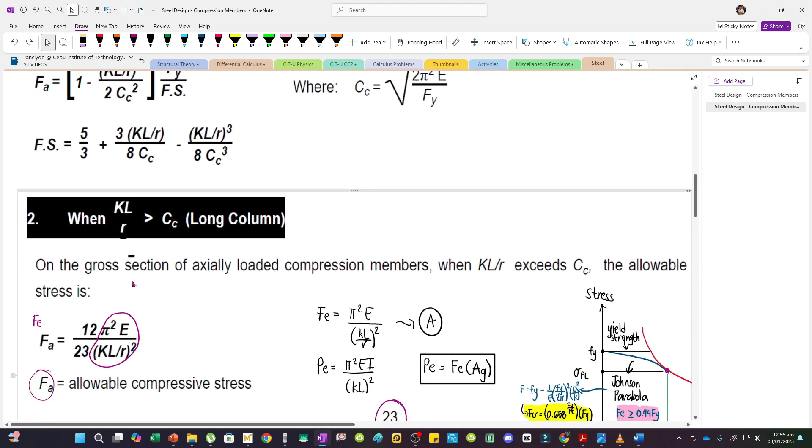And then, C sub C, the same pa rin yan. 2 pi squared E over Fy lang yan. Now, this is 125.66. So, what you can notice is, mas malaki yan. Therefore, long column pala, diba? If SR exceeds C sub C, greater than C sub C, we have a long column.

Therefore, the allowable stress pala can be computed using this formula. Medyo madali lang. Pi squared E divided by KL over R squared, then multiply mo lang by 12 over 23. So, FA equals 12 divided by 23 multiplied by pi squared, then 200E3 divided by SR squared. Now, what you have to use is still SRY. So, we would have 12 divided by 23, multiplied by pi squared times 200E3 divided by SR squared, nakastore sa letter D.

Ayan, bago kasi yan. Recall D, and then square natin. Press equals. For a while nakastore pala sa F. So, this is F pala. Yan yung KL over R or SRY. Then, palitan ko na lang to. F. So, again, we would have 47.075. Ayan. Ito yung allowable stress.

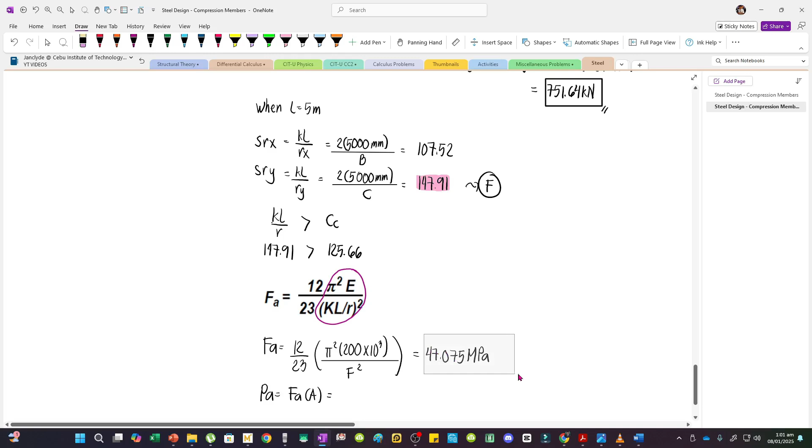So, naka-MPa yan. And then, our allowable load, this would be FA times A. Copy mo lang to. And then, multiply by the area. The area is still 2 times 3780. So, equals answer times 2 times 3780 na lang. So, we have 355,887.85. Now, this is in newtons.

So, newtons, convert to kilonewtons, divide by 1,000, we would have 355.89. Tapos, naka-kn. So, copy ko na lang to. Ito yung PA, allowable load.

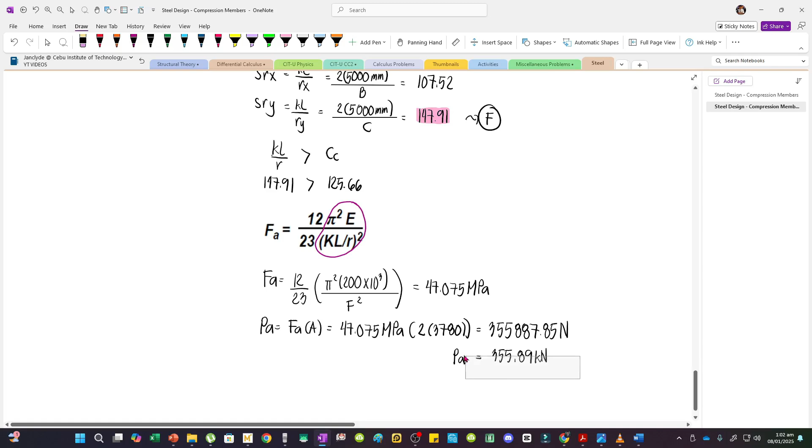And then, for PC naman, ito na lang yung gagamitin ko, FE. So, pi squared E, 200 times 10 to the 3. Then, KL over R squared, yan yung KL over R nakastore sa F. So, recall F, tapos naka-square, then multiply by the area. Area is 2 times 3780. So, 682,118.37.

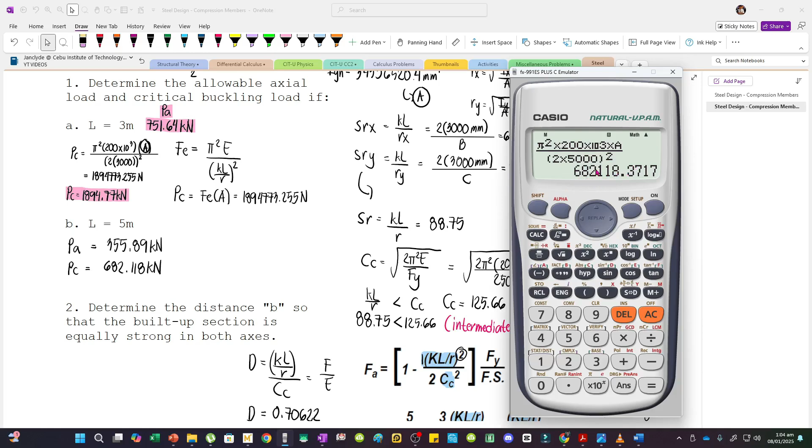Or, in kN na lang, divide by 1,000. By the way, we are using this formula pala, FE times A na lang. 682.118 kilonewtons. Or pwede rin, this formula, pi squared EI divided by KL squared. So, we would have pi squared times 200E3 times recall A. Then, divided by 2 times, instead of 3,000, use 5,000 kasi 5 meters na. So, 5,000 then squared equals the same pa rin. 682.118 kapag naka-KN na. So, again, depende na yan sa'yo kung ano yung preference mo.

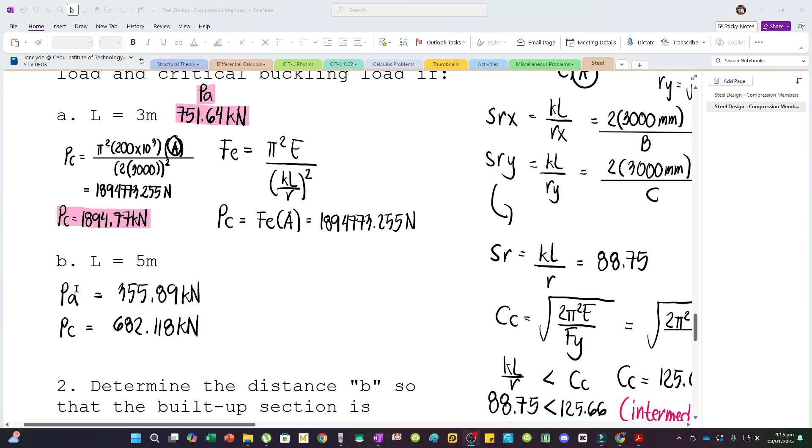However, by common sense, dito sa long columns, nag-multiply tayo ng 12 over 23 to account for the factor of safety. So, essentially, itong value na to, yung PA, if i-revert natin siya, magiging PC yan. Try natin. We have 355.89 and then, di ba, 12 over 23, kapag i-reverse natin siya, magiging 23 over 12 para makuha natin yung PC. So, press equals, the same pa rin. Now, merong discrepancy lang dahil sa rounding off of values. So, pwede talaga to. Mas madaling process yan.

Now, we have a bonus question. Determine the distance B so that the built-up section is equally strong in both axes. Now, what this means is, kailangan equal yung IXN saka IYN. Ano daw yung back-to-back distance daw? Dapat. So, essentially, equate natin yung IXN.

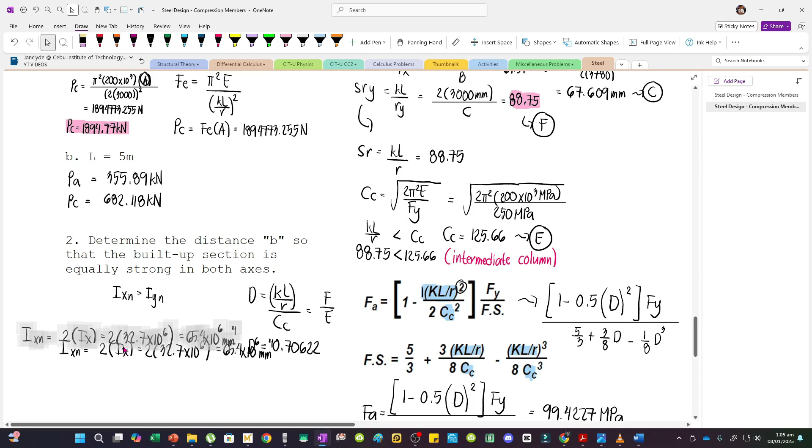IXN is, di ba, this value. Equate natin sa IYN by using the variable only, kasi wala pa tayong numerical value. So, copy ko yan. And then, gagawin natin is, equate natin to. This one, this is IXN equals, the back-to-back distance is nasa part na to. Instead of 100, we have to use B. So, equate to IYN. Palitan natin yan. This must be B.

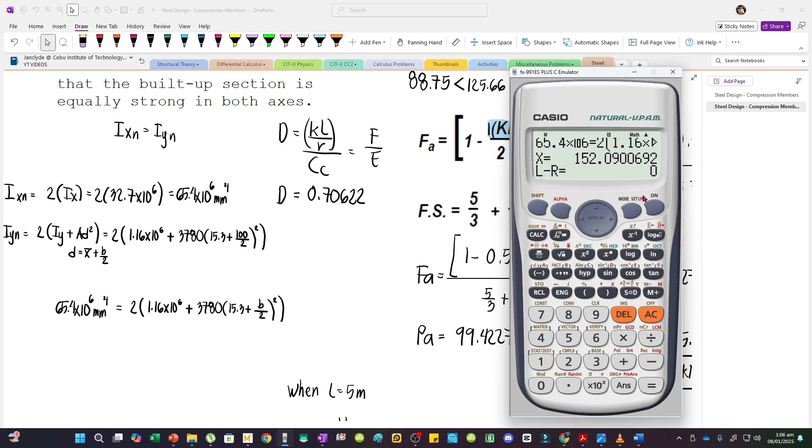Variable distance na kasi. So, we would have 65.4 times 10 to the 6 equals 2 times 1.16 times 10 to the 6 plus 3780 times 15.3 plus b over 2, tapos naka-square dapat. Solving B, we have 152.09 and then this is mm.

So kapag ito pala yung distance, let's say 152.09 yung distance na yan, then we don't have to choose between IX and IY kasi the same lang yung moment of inertia nila. Now, nagkataon lang na 100 yung ginamit, so magkaiba talaga yung strength nila. I mean, yung resistance to bending according to the moment of inertia.

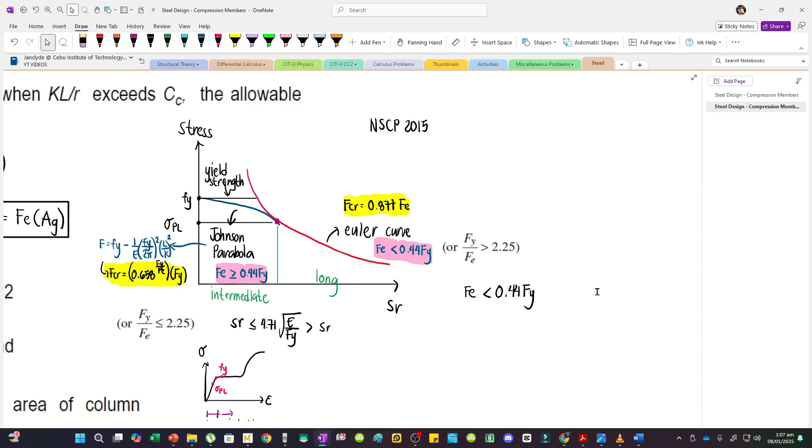Sige, so yun lang for now. And then sa next video natin, we will tackle multiple problems using NSCP 2015 na, itong codes na to. But sinali ko na lang lahat para holistic talaga yung discussion. Sige, so I hope meron kayong natutunan and salamat sa pakikinig.